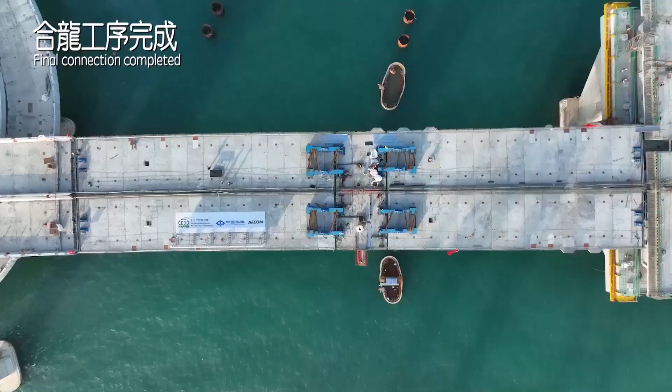Congratulations to the team on achieving such a remarkable milestone. I'm sure the audience would like to know more about the project. Michael, would you mind telling us a bit more about why we need this Causeway Link and what the scopes of this project are?

Pleased to do that. This is the alignment of Route 6 and Causeway Link. The trunk road is 14.5 kilometers, at a total cost of 80 billion. The central road between Yau Ma Tei and Kai Tak is delivered by Highways Department. CEDD is delivering the rest of the trunk road, a total length of 10 kilometers, at a total cost of 40 billion. The whole Route 6 is expected to be commissioned by 2026. So let's turn our focus to our key masterpiece today, the Causeway Link.

With further development of 將軍澳 New Town, the traffic demand is expected to grow. Causeway Link will provide an alternative access route to the southeast part of 將軍澳, thereby enhancing the road connection network of the area. Upon completion of 將軍澳 Lam-Tin Tunnel and Causeway Link this year, coming from the southeast part of 將軍澳, you can commute to and from the western part of 將軍澳 via Cross Bay Link, or to and from Kowloon East via 將軍澳 Lam-Tin Tunnel. Journey time during peak hour is expected to be reduced by about 20 minutes.

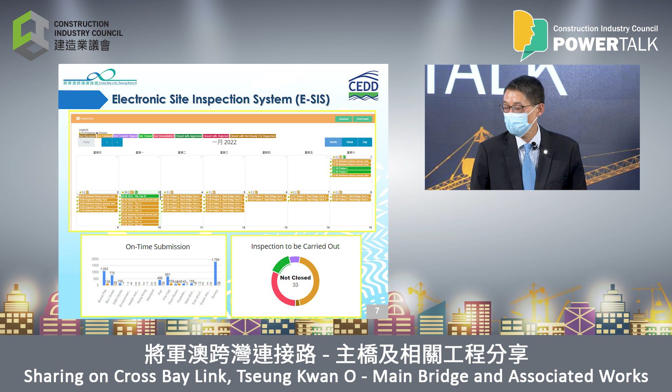Thank you. Thank you, Michael. I think we have got an outlook of how this electronic system works. And I also know that the Cross Bay Link is the first and the only major bridge in Hong Kong adopting a fully digitalized design with the DfMA and prefabricated design concept.

Michael, do you mind telling us a bit more: what are the challenges of using all these digitization tools, what are the expectations from CEDD to your contractors, and how can all these digital tools be used to really solve the engineering challenges we face on the project?

As a client, CEDD attaches importance to using digital tools in the early planning stage to promote the standard of the industry. So we specify the use of digital tools such as BIM as an essential requirement in the tender documents, so the project team will be fully prepared before work commencement.

We fully appreciate that frontline staff, be it contractor or consultant, may not be familiar with the use of digital tools. So for the successful promotion of such tools, we stress that user-friendliness as well as buy-in are all key elements to its success.

For example, at the development stage of ESIS, the project team studied the entire process of submission and review, and coordinated with our frontline staff, namely RSS and contractor, on how to streamline the process and help to improve efficiency. Not to mention, continuous review and sufficient training are essential for a successful promotion.

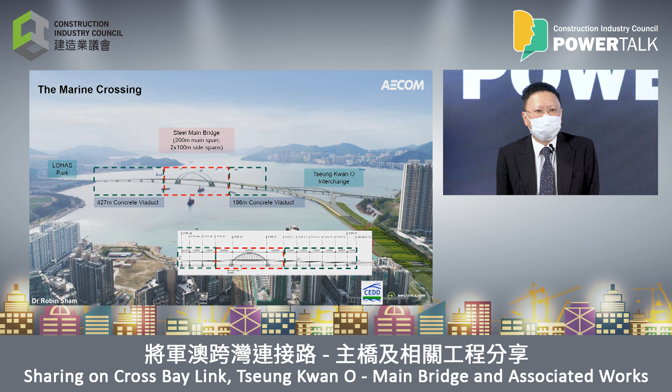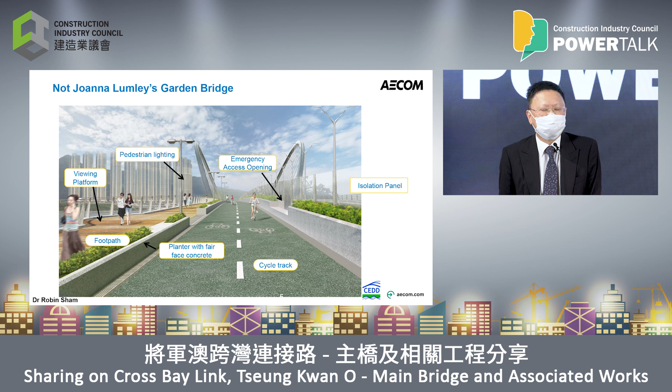The two arch ribs incline outward, and they seem to disappear, or I would say they merge seamlessly with the deck girder. So the end result is kind of like the mathematical symbol of infinity. And that, to many people, personifies the very best, the vision, energy, and eternity of the people. You can see the infinity symbol.

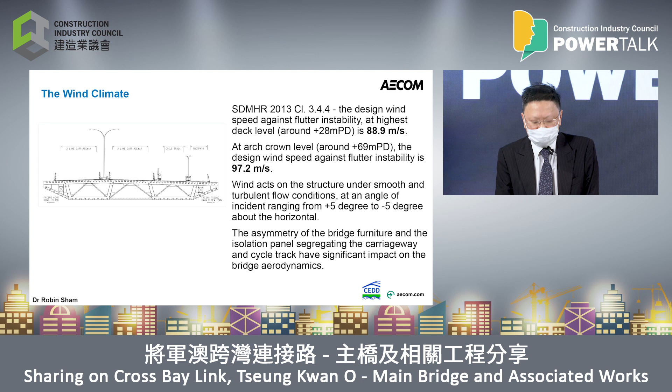Of course, we studied the wind climate in order to design this bridge. At the girder level, the design wind speed is 89 meters per second, and at the crown, the top of the arch, it's 97 meters per second. Now you can see a driver's view. You look at the cross section of the deck. It's asymmetrical. And also the bridge furniture is different, not symmetrical. So that poses a lot of very interesting aerodynamic problems to be resolved.

Thank you, Robin. I see that the infinity or eternity arch also looks like the icon for a technology company. They recently rebranded themselves as Meta. Yes, so it looks like quite a similar shape.

Robin, do you mind also describing a bit more what innovative ideas you have adopted to develop this project, to make sure this project has been delivered successfully? Okay, step number one.

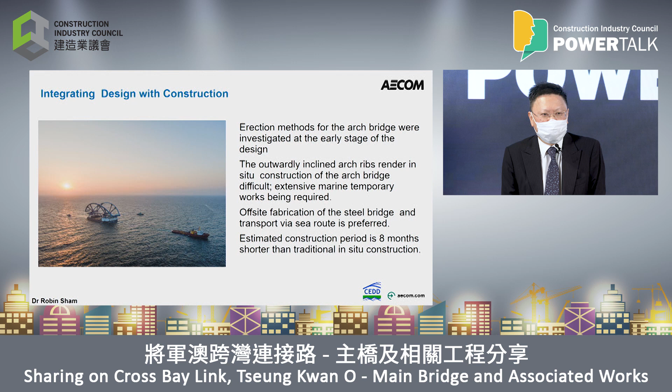Any design we do, we think about construction. So I like the phrase, we integrate design with construction, because we already built into our analysis and design construction method and sequence. May I tell you more? So up front, we were thinking about how exactly the bridge can be built.

So for the Eternity Arch, one method is to lift it by a barge crane. And we look at the availability and different types of barge crane in the Asia region. And as you know, during lifting, the load paths and the stresses are quite different from the permanent condition. So if this method is adopted, we have to do the analysis and creative design very carefully and meticulously.

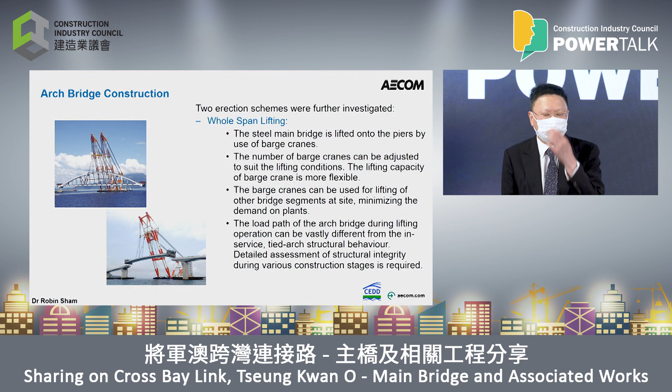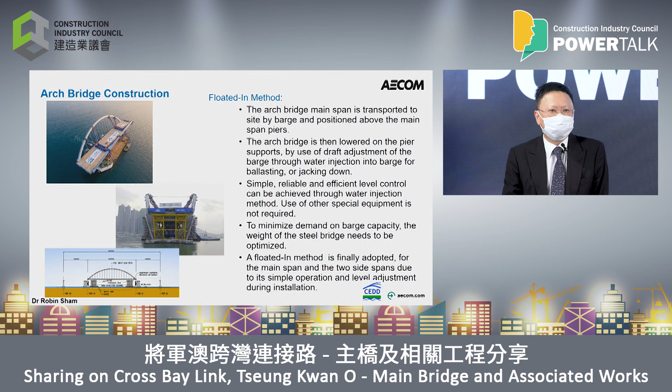Now, again, in my young days, I had a lot of toys built in Lego bricks. By the way, I still do. I still have them. So I asked myself, how best to achieve quality, fast track, and competitive pricing? Why can't we build that bridge like Lego bricks? That's exactly how it was built. And of course, we built that into our design.

And let's look at some of the optimization we've done. When we started, the first thing that came to mind would be a trapezoidal box, with solid diaphragms. We changed all that. You see the solid diaphragm has been replaced by space trusses, so lightweight. And this is the first time in Hong Kong that's been done. And we replaced the single trapezoidal box by a twin box, so it further reduces the weight of the structure.

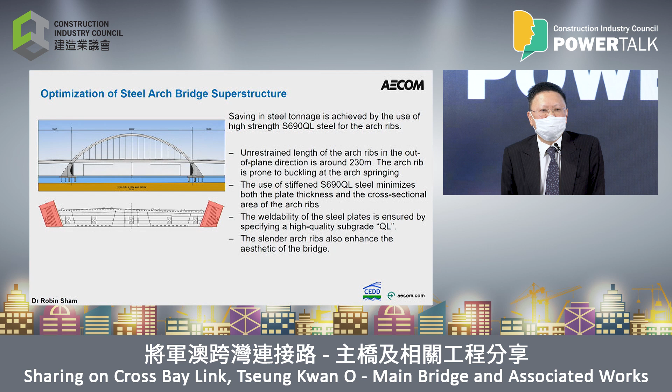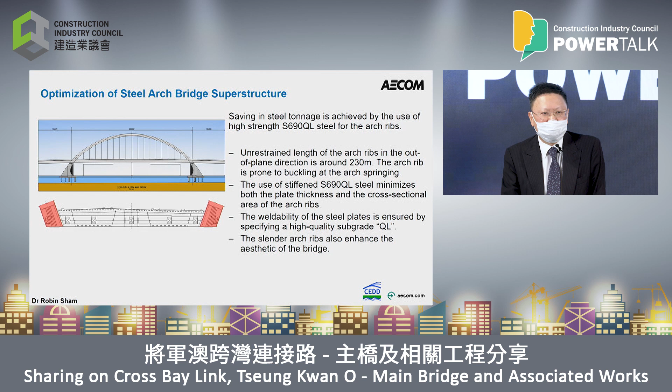And for the arch rib, we adopted high strength steel, 690 grade. Why would we want to do that? Because the stresses are quite high at the springing. And one thing we always endeavor to do is to reduce the carbon footprint of our design. So using the 690 high strength steel, we managed to reduce the carbon footprint by around 40%. Okay, so you can see the twin box there, as I mentioned earlier.

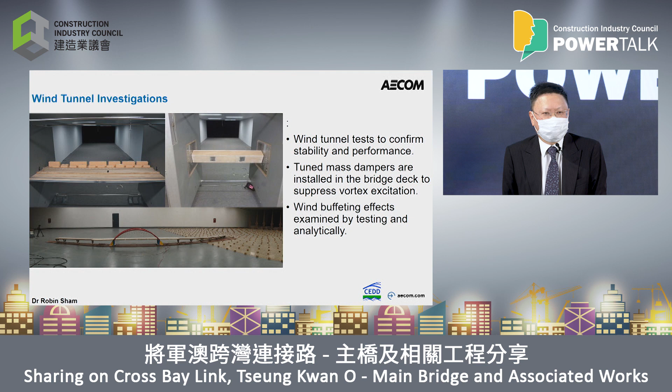I mentioned that there have been some very interesting and challenging aerodynamic problems. So we've done a series of wind tunnel tests. What you see here is a section model test. That's yours truly in the wind tunnel with the section model. And you can see the model cars, and in the foreground, you see the planter and the isolation panel.

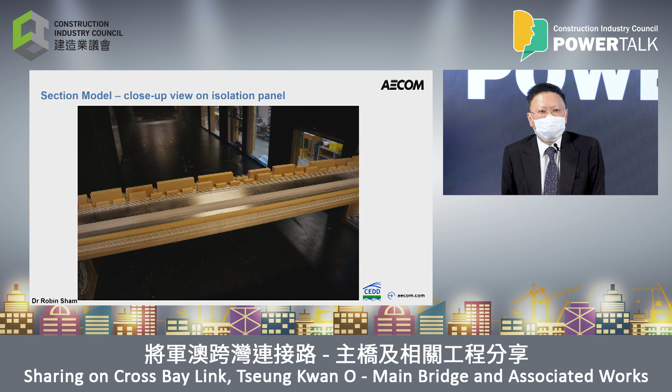Why would we have an isolation panel? Because this is a living bridge for commuters, and also for leisure activities. So we have a transparent solid panel segregating the live carriageway and the footway and cycle track. So that itself poses a lot of aerodynamic challenges.

Here's another series of section model tests, this time in Nantes, in France. You can see the vehicles on one side, and this is a blown-up view. You can see the planter, the segregation panel, and in fact, I believe the video has started, but the wind speed in the tunnel is just increasing. So you can hardly see the motions. Later, you will see a little bit of motion.

And in all tests, we keep increasing the wind speed to push and to investigate at what point the design might become unstable. Sometimes, of course, we have to stop. We come to our senses, because we don't want to break the model. So when we see it surpass the design wind speed for instability, we stop.

This is, again, an earlier version of the design. You see the two edges of the deck girder. We have cantilever wings. And that geometry and configuration, combined with the segregation isolation panel, gave us a lot of vortex oscillation problems. So we designed sometimes by experiment.

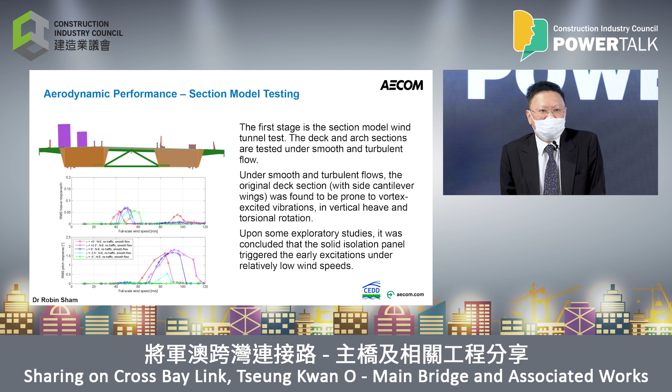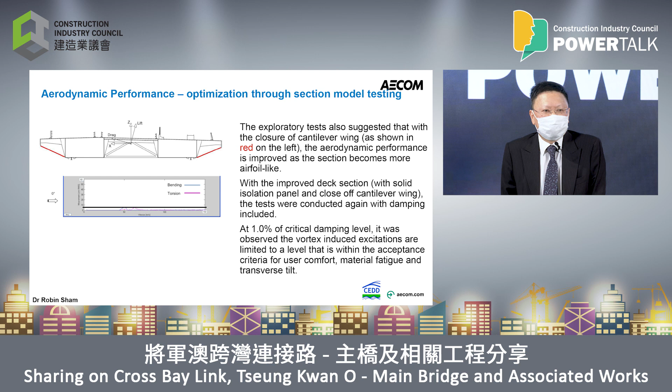So we found if we close up the underside cantilever wings, as you can see here in red, we close it off, and then we were experimenting with closing off the bottom, the soffit, and reconfiguring the bridge furniture, and we found closing off the underside cantilever wing resolved the problem.

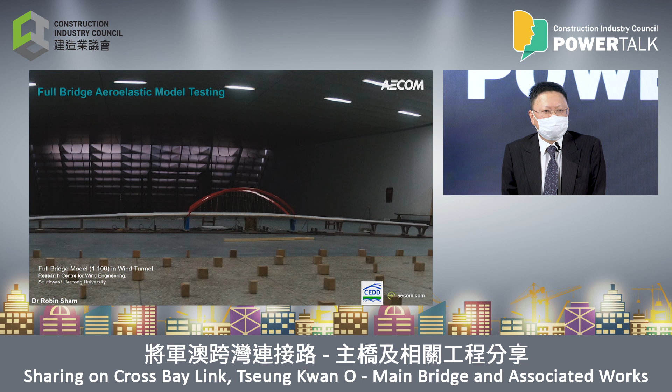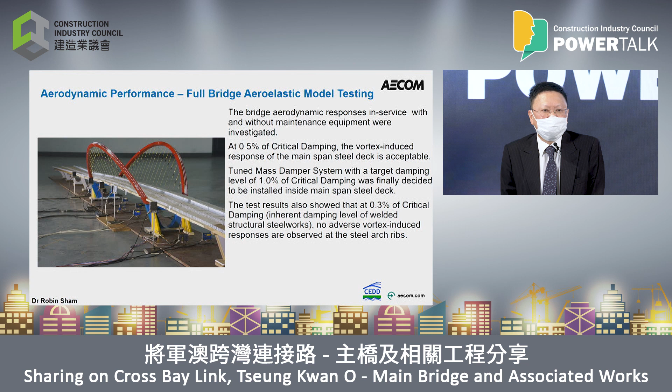And then Michael and I went to the largest civil engineering wind tunnel in the world. That was in Chengdu, and we tested our aeroelastic model. In this set of wind tunnel tests, we found 0.5% of critical damping suppressed the vibration of the girder, and then 0.3% suppressed the vibration of the arch ribs. So that gave us data for the damper design.

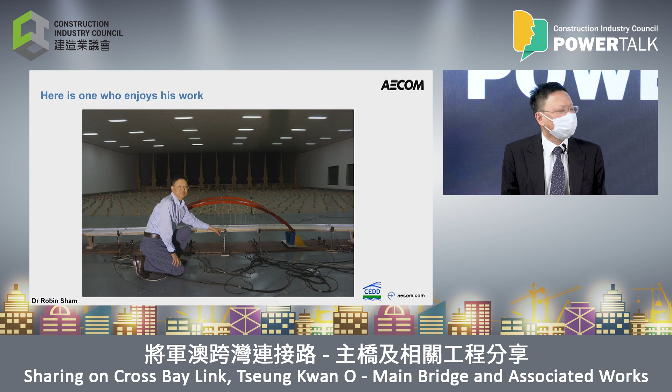Originally, this photo was for the benefit of my boss to show I was actually working. But fortunately, Michael was there. So Michael confirmed Robin had actually been working hard.

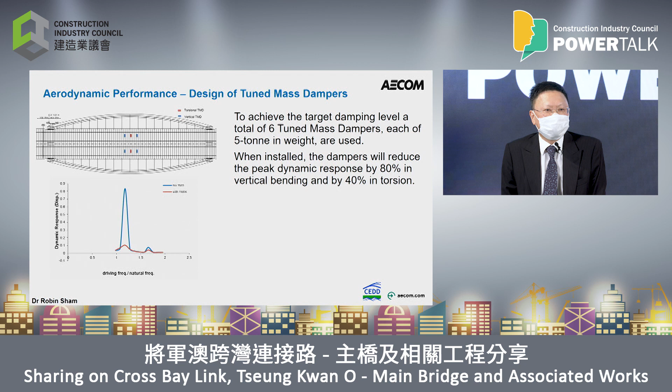So with wind tunnel results and also by dynamic analysis, we designed and later installed a number of tuned mass dampers for suppression.

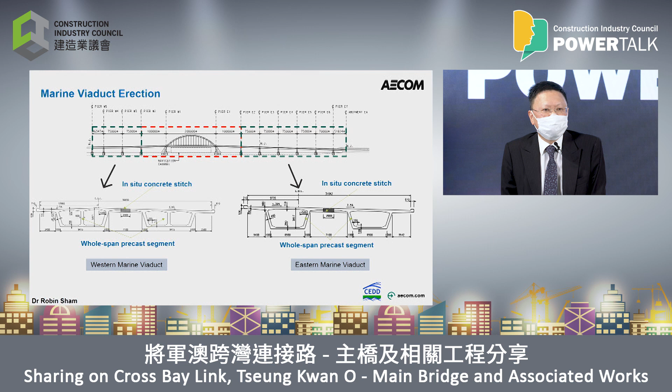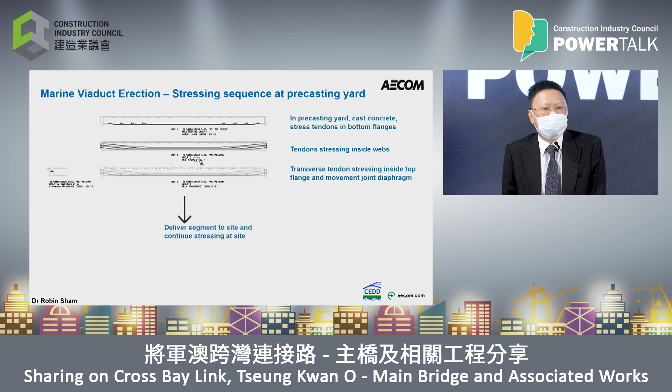Now this is a view of the marine viaduct whole span lifting method. How fast track can you be if you lift the whole span? Okay, so the 18 number lifting operations. And the design in the precasting yard, we stress the bottom flange, the web, and then we transversely stress the top flange. And the girder at that point is self-stable, and the stresses are adequate for lifting.

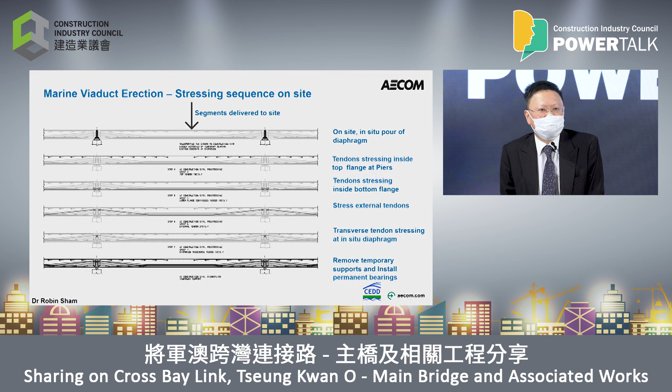Now this is on site. On site, we complete the stressing operation. And to give you a bit more detail, a lot of us design to British standard. So intuitively, you design the girder longitudinally as a pre-stressed structure and transversely as reinforced.

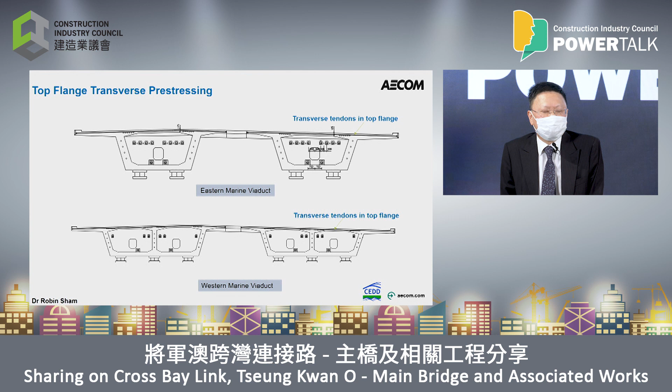I worked in Western Europe, and they actually use transverse pre-stress. And then a colleague of mine gained his experience from Japan. So he can also apply that technology for durability and for transversely spanning larger distances. Now this is the articulation we use.

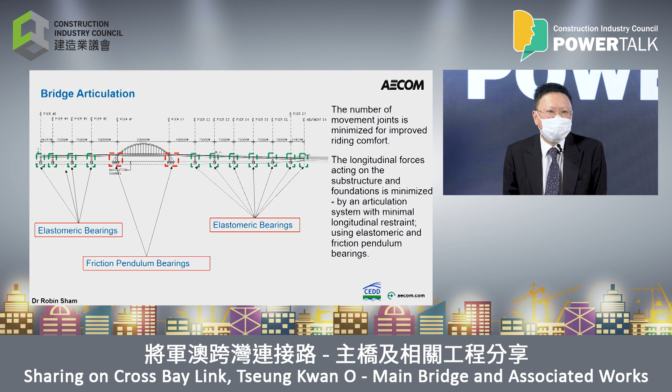Thank you. Now, a picture is worth 1,000 words. We have filmed on location the erection of the Eternity Arch. Please enjoy.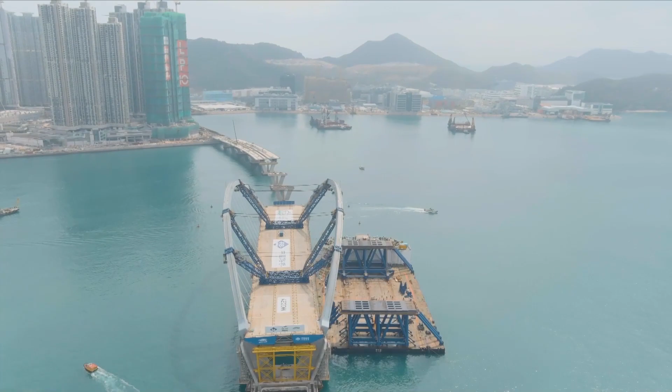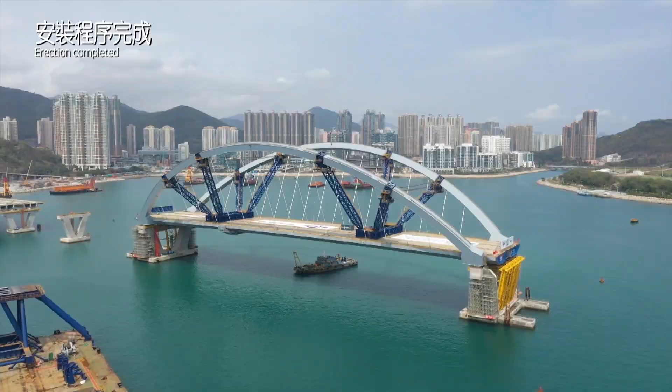Robin, thank you so much for sharing all these innovative ideas and technical details on how you developed such a challenging bridge design. And I'm sure Cross Bay Link will definitely be the new icon of Tseung Kwan O.

And I know that Cross Bay Link has achieved many firsts in the Hong Kong construction industry during the delivery of this project. So it would be nice to have Engineer Wong here to tell us a bit more about how you have utilized digitalization tools to optimize the construction delivery of this project. Engineer Wong, please. Thank you, Thomas.

Ladies and gentlemen, it's my great honor to share with you the construction digitalization for this iconic bridge. In delivering this project, we have achieved many firsts in the Hong Kong construction industry. The first time we used the float-over method to install the full-span butterfly bridge, with a weight of about 12,000 tons, including temporary works.

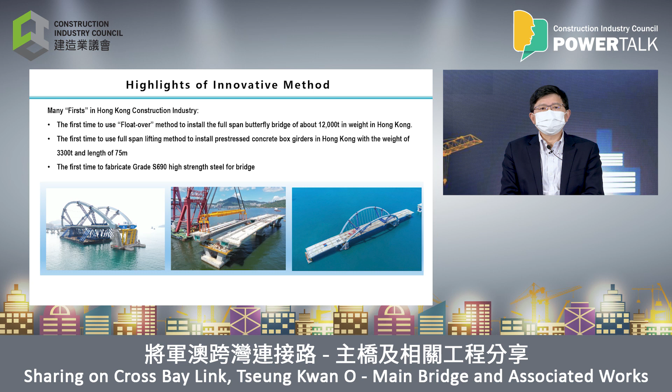To go for digitalization, the key is to change the mindset. By changing the mindset from traditional to digital, we have achieved better collaboration and coordination among all stakeholders, which we found to be fundamental for the successful delivery of this project.

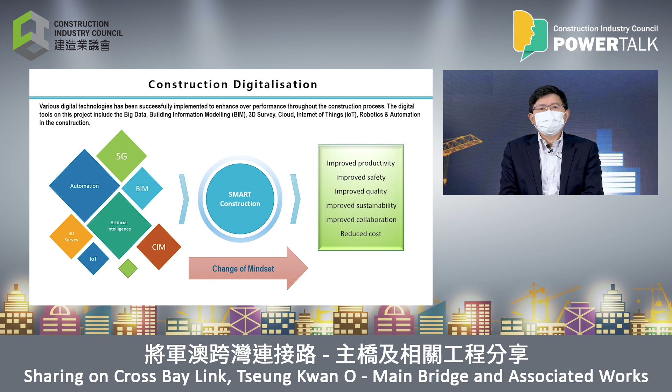On this project, we adopted many digital tools, including big data, BIM, 3D survey, and also IoT, robotics, and automation in construction. From the beginning of the project, we formulated strategies for applying construction digitalization on this contract.

Our digitalization structure covers 6 aspects, which include digital design and planning, digital management platforms, robotic construction, DFMA with digital tools, digital works supervision system, digital twin, and 3D surveys.

The VR3D CIM platform is a comprehensive management platform which supports visualization of 3D GIS and BIM in one integrated viewer for users. Our digital platform includes 4 modules: planning and design, photo management, 3D data management, and deformation management.

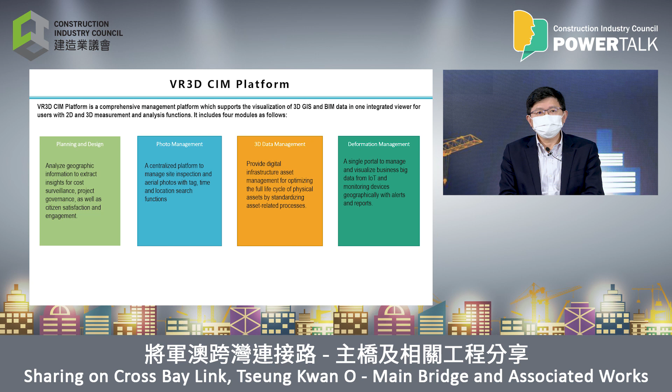On this contract, the BIM model was integrated with GIS information such that it could be displayed and manipulated with great geographic detail. Site photos could be displayed and filtered according to their locations. IoT sensors monitor the site environment and are integrated with centralized platforms.

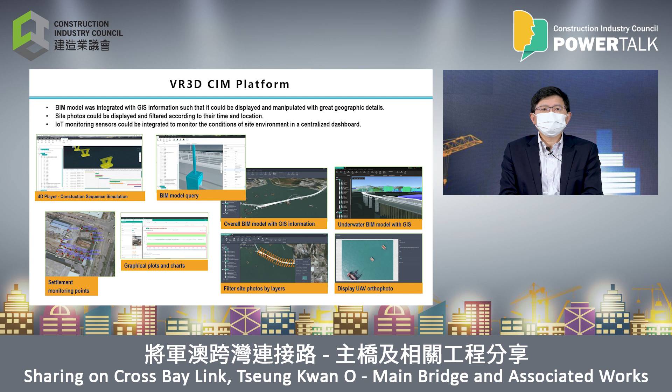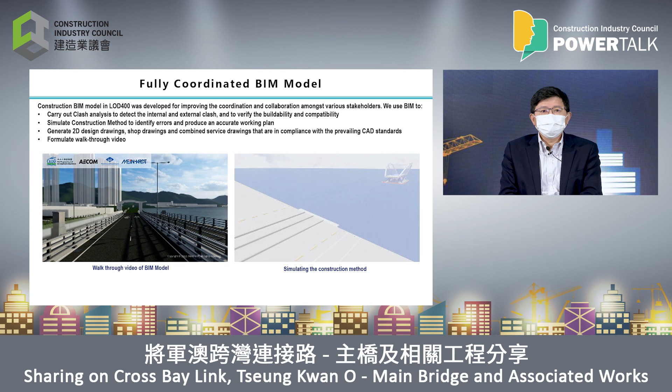Construction BIM models in LOD400 were developed for improving construction. We use BIM to carry out clash analysis and detection to verify buildability and compatibility. We use BIM to simulate the construction method and sequence. We also use BIM to generate design drawings, shop drawings, and combined services drawings, and to produce walkthrough videos.

Digital technology is also used for the fabrication of the steel arch bridge and the steel side spans. With the adoption of highly developed BIM models, the fabrication of a steel bridge becomes digitalized throughout the whole production process in a more effective and efficient manner, in which the fabrication processes, such as design, shop drawing production, welding, sub-assemblies, and assemblies, are all integrated in BIM-based platforms.

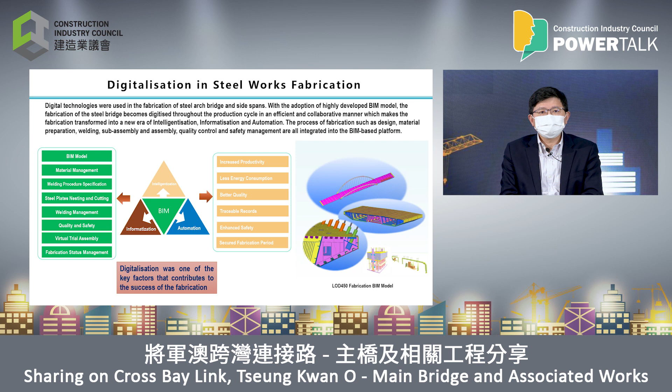By using the 3D laser scanner and digital photographic technologies, we can carry out pre-virtual assemblies for the fabrication of the steel bridges before the real assembly is carried out.

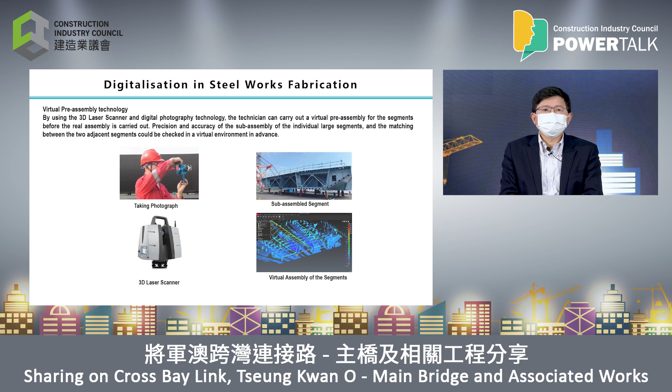Yes, we also applied 3D digital surveys on these projects. This 3D digital technology was adopted for reality data capturing, which includes UAV photogrammetry, UAV photo taking and processing, and 3D laser scanning. This 3D digital survey makes surveys safer, more accessible, more cost-effective and efficient, while achieving sufficient accuracy.

The rapid speed of data capture from a 3D laser scanner allows millions of data points to be recorded in just seconds. The image here shows the comparisons of the laser scanning data with the BIM models. You can see even minor differences in the geometry of the as-built bridge could be identified when comparing its laser scanning data with the design values in the BIM models.

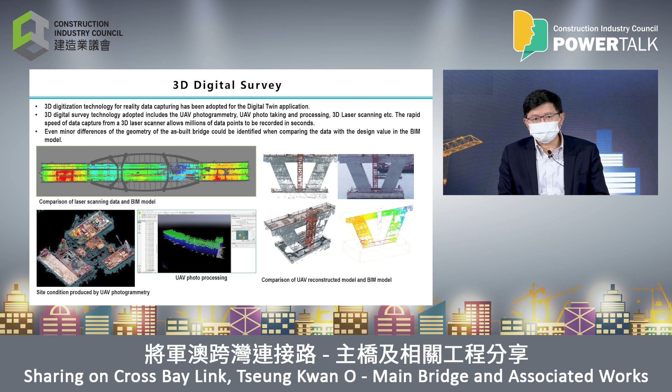On these projects, we also apply and adopt DFMA technology from the substructure to the superstructure of the bridge, which includes DFMA for the precast shell of the pile cap, DFMA for the precast V piers and also straight piers, DFMA for the precast segments and precast box girders.

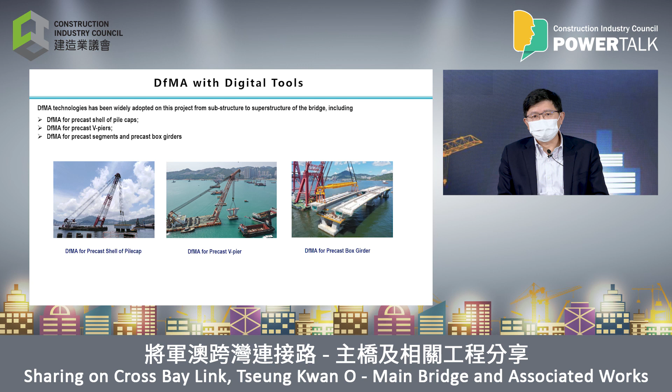The digital twin was also applied throughout the whole process of the DFMA, from the initial planning and design until the off-site fabrication and on-site installation. During the design of the DFMA elements, BIM was used to simulate the whole construction process in a virtual world to verify buildability, to schedule the program planning, and also estimate the savings in both material and carbon footprint.

From the photos here, you can see even the details such as rebar details, connection details, and also the vessel deployment plan can be studied in advance before they are actually implemented.

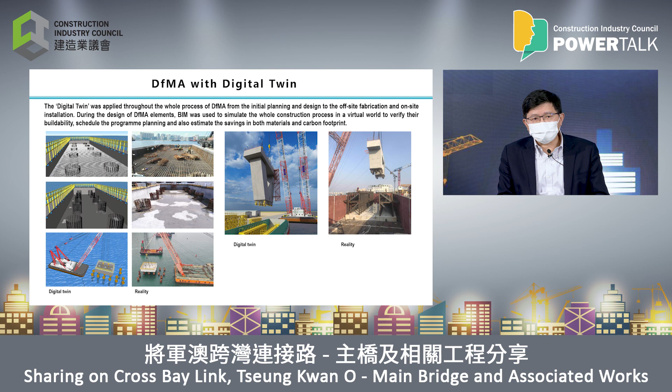We also applied DFMA for the steel arch bridge construction. The steel arch bridge was fabricated and fully assembled in the off-site yard in Nantong, Jiangsu province. After being loaded out to a delivery barge, it was transported to Hong Kong by a semi-submersible barge, and then installed on the pier by the float-over method. This method makes use of the tide and also the ballasting of the delivery barge. With this method, we completed the whole installation process in just 5 hours.

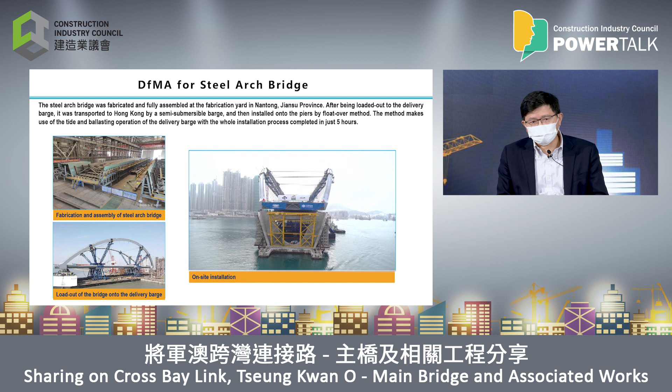A digital works supervision system was also adopted on these projects, which has enabled the project team to better control and monitor the off-site fabrication in efficient and effective ways. This DWSS system is capable of creating the list of tasks in a timely manner, assigning tasks to teammates, and analyzing the collected data automatically. We adopt these systems both on-site in Hong Kong and also off-site in mainland China. Productivity of the inspection is increased by 80% thanks to the application of this DWSS.

On these projects, we also adopt many robotics for the construction activities. Here are some examples. We have used a hydro-demolition robot named Aqua Jet Cutter to trim the pile head of the bored pile, which offers benefits such as low dust and noise, and fewer workers compared with the traditional method. In addition, we also use a robotic breaker to work in combination with the Aqua Jet Cutter in trimming the pile head. All those robots were remotely controlled with great enhancement of safety.

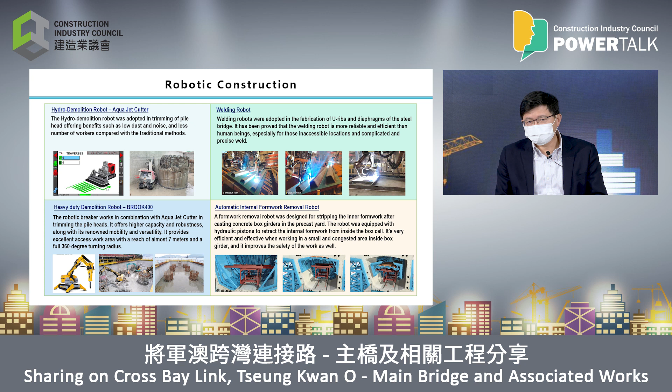Thank you. Thank you, Engineer Wong. It's so impressive. You literally help us to redefine how modern bridges should be built. And I must say that without courage, vision, and the collaboration mindset between all of you, I don't think we could deliver such a successful project. And it also became a showcase for the whole world of how modern bridges can be built.

I've got a question I would like to ask all three of you. It's about your view on how digitalization will change our construction industry. So let me ask my friend sitting right next to me, Robin, what's your view on that? To me, digitization actually opens up new horizons in the construction industry. Of course, the industry has no shortage of talent, but the bar is set higher and higher with this new technology, and talented people have more tools, or more suitable tools, to aim high and achieve more.

Closer to home, we have a digital technology team in the office, and we can give them all sorts of praises, compliments, but I think what personifies their success is they help us to unlock our own talents. In our creative design, with the help of digital technology, we can experiment, we can visualize different shapes, form, profile, different shades. Earlier, I talked about integrating design with construction. With digital technology, we can do virtual erection sequence, methods and sequence.